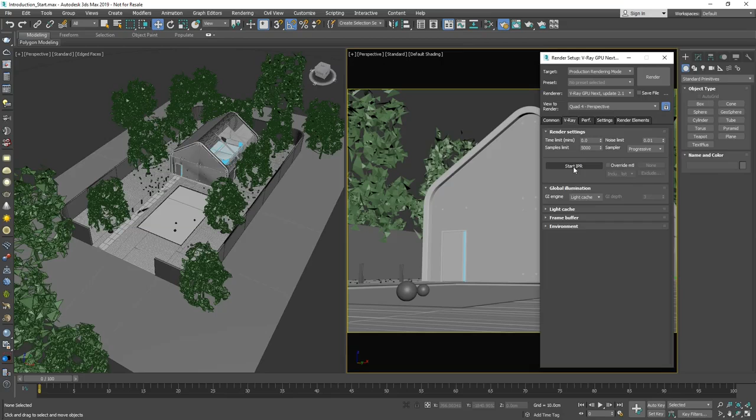Both V-Ray Next and V-Ray Next GPU can use IPR, and you can also start an interactive render from the V-Ray Frame Buffer, or VFB for short. Let's close the render settings and open up the VFB, which is the render display window for V-Ray renderings that includes a number of V-Ray specific features we'll discuss in more detail in a bit.

For now, let's go ahead and start the IPR by clicking on the little teapot with the green arrow at the top right, and see what we've got in our scene here so far. We can tell it's rendering because of the progress bar at the bottom, which shows the progress of the render. However, you can see that everything is dark, and we're not seeing anything in the VFB. This is because we don't have any lights in our scene yet.

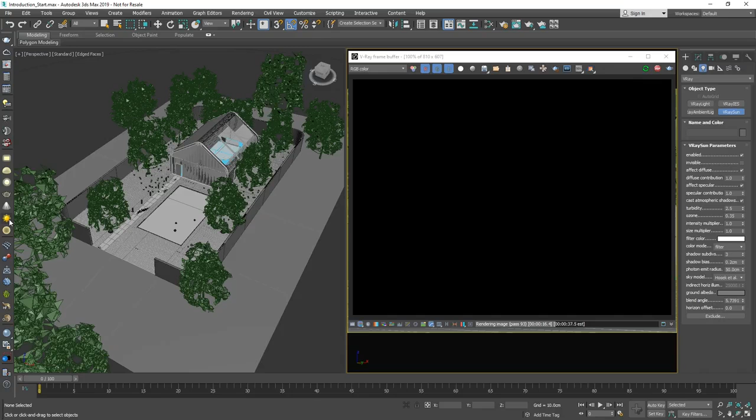To add some light, let's go to the V-Ray toolbar and select the V-Ray Sun. The V-Ray Sun gizmo consists of two parts, the sunlight source and a target. In the viewport, let's click and drag to place the sun source and draw out its target direction in our scene.

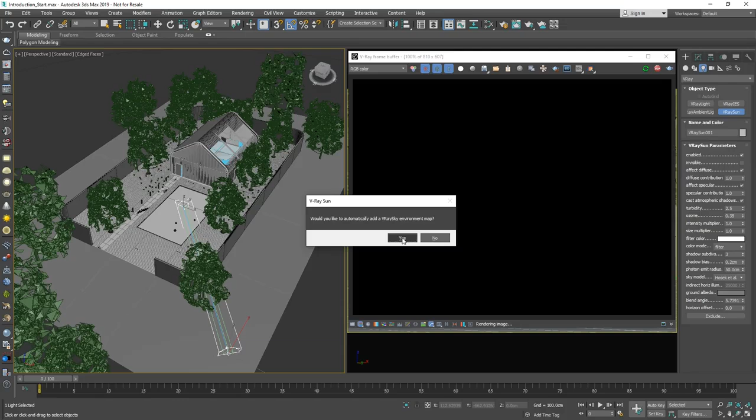Next, we will be prompted if we want to add a V-Ray sky map in the environment slot. Let's choose Yes, since the V-Ray sky map will automatically change in accordance with the sun's position. This creates a very easy setup that enables us to try out a variety of natural-looking sunlight scenarios simply by moving the sun's position around.

Now you'll see that the VFB immediately updates to display the sunlight. Let's go ahead and tweak the position of the sun by bringing it up above the ground level a bit on the Z-axis. As we move the sun higher, you'll see in the VFB preview that our image quickly becomes overexposed.

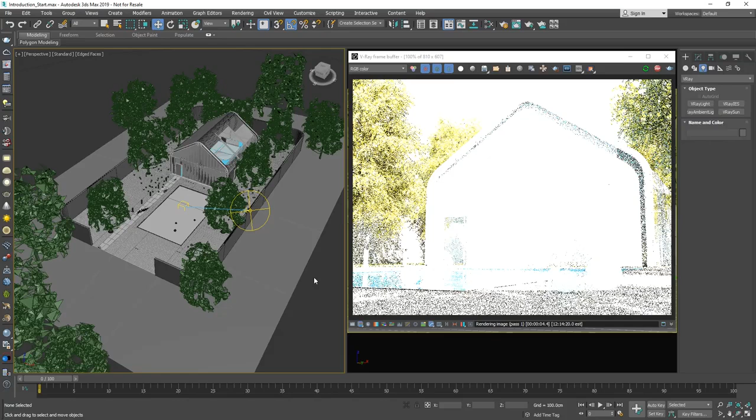This is because we haven't set up a camera in our scene yet to adapt to the sun's exposure value. To create a camera from our current perspective, let's move the VFB over and then select this perspective I have already arranged in advance in the viewport on the right. Then click on the V-Ray Physical Camera shortcut, and a camera will be created and applied to the perspective's position.

You'll also notice that the exposure in the VFB has automatically updated, as the render is now taking into account the physical camera's exposure settings. If you'd like to tweak the exposure further, you can head to the camera's settings in the Modify tab, where you'll find controls that emulate those of a real-life camera. These include the film speed or ISO, the f-number, shutter speed, and many other options.

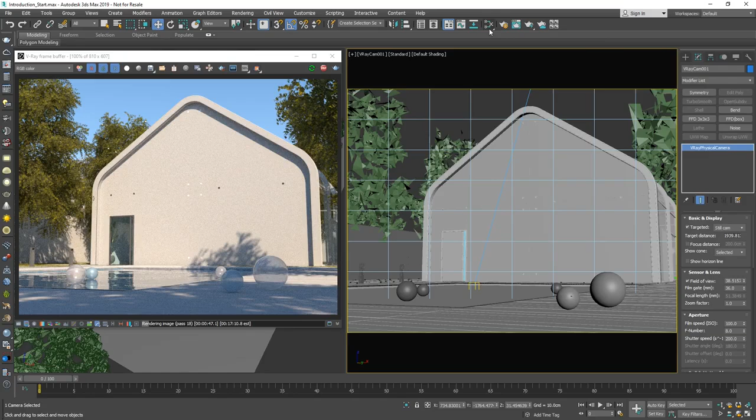Alright, you may have noticed that many of the objects in our render have a generic gray material applied to them. To create some new materials, let's open up the Material Editor and then maximize the viewport view by pressing Alt-W in 3ds Max and explore how to create and apply V-Ray materials to our scene.

Creating new materials in V-Ray is easy. Simply right-click on the Material Editor's canvas, and in the Materials menu, you will see a V-Ray section which contains all of V-Ray's material types. Also, if you go to the Maps menu, you will find a V-Ray section there too, with maps that only work with V-Ray materials.

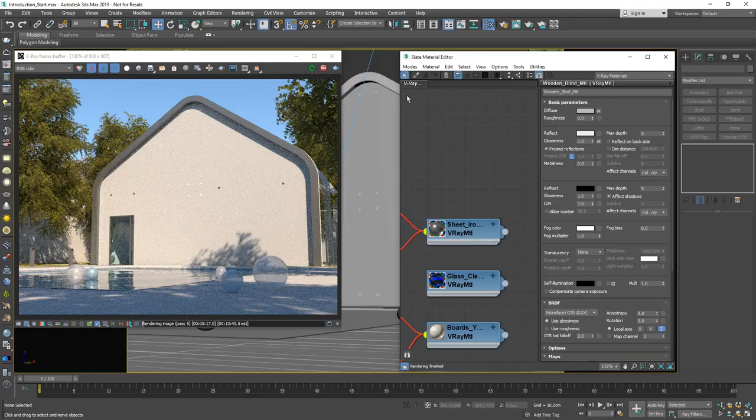As you can see here, we already have 3 V-Ray materials I have prepared in advance to use in our scene. Let's go ahead and apply each of them by simply dragging their outputs to the corresponding objects in the scene. Now you can see as the render updates that our image is quickly becoming much more realistic looking with the added materials. And we get an updated preview right away thanks to the IPR mode.

Alright, now let's explore how we can do a final production render. Close the Material Editor, press Stop to stop the IPR, and exit the VFB. And then let's open the render settings once again.

First, in the Common tab, let's increase the resolution of our final render by adjusting the output size. I'm going to set it to 1440 by 1080, but you can feel free to use a different resolution if you'd like. From the V-Ray tab, let's also change the sampler mode from progressive to bucket mode.

So far, we've seen progressive sampling when using the IPR mode. It generates a preview of the whole image as it renders and cleans up the noise, which is useful when you need interactivity. It also gives you control over stopping the render early if you are okay with the result.

For a final production render, however, bucket sampling is generally advantageous as less data is kept in memory, especially when working with render elements. In addition, buckets can also cut down on network traffic for distributed rendering and reduce the risk of losing information if a server goes offline.

Another setting you can tweak to improve the quality of your render is the noise threshold. When rendering, V-Ray will continuously clean up the noise in the image over time so that the image becomes clearer.

The noise threshold determines if a pixel needs more samples. The lower the threshold, the less noisy and higher quality the final image will appear, but the longer it will take to render. Since I prefer getting a faster render result than achieving the highest possible quality, we can add a V-Ray denoiser render element in the Render Elements tab.

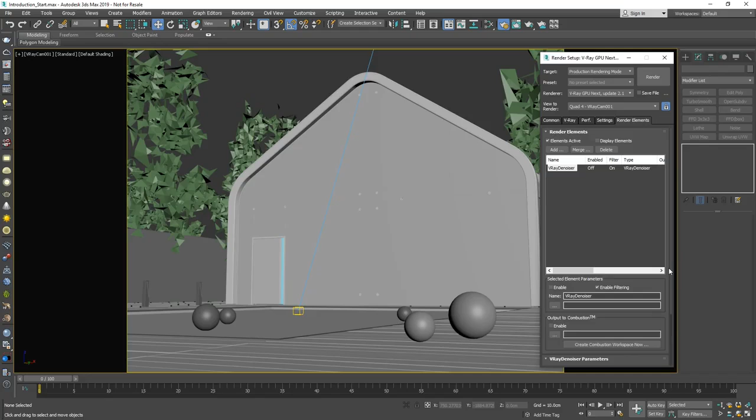Okay, now we can start a production render by pressing the Render button. And once it starts, you'll see how the buckets appear and begin rendering the image.

Alright, now that V-Ray finished rendering, I'm going to maximize the VFB so we can have a better view of the rendered image. Then, let's zoom in on the glass door, and to double check that the denoiser worked, we can toggle the RGB button here to switch between the default RGB image and the effects result.

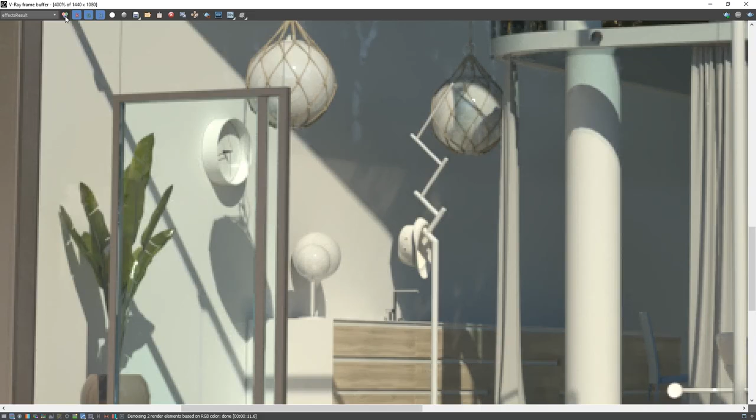The effects result channel holds the result of the denoising operations and the lens effects that are executed over the image. You can see that the denoised image is a bit smoother looking overall, particularly in the glass and shaded areas. Now, since our image looks a bit too yellowish and flat for my taste, let's explore how we can apply some color corrections to it.

If we click the button at the bottom left of the VFB, the V-Ray Color Correction toolbar will appear on the right. Here you'll find parameters for further tweaking the image, such as exposure, white balance, curve adjustments, and more.

Let's click to expand the exposure parameter and check the box to enable it, so that now its controls will affect the image. I'm going to adjust the exposure value, the highlight burn, which corrects the exposure of only the highlights in the image, and tweak the contrast a little bit.

Next, I'm going to tweak the white balance parameter, which offers a slider with values in Kelvin temperature. Lower values will make the scene appear warmer, whereas higher values will make the scene bluer in tone. You can feel free to play with these settings on your own and adjust the image to your liking.

When you're done, you can also save your current color correction settings for later use, or even load in a pre-existing color correction file by clicking on the Globals option up top. In this case, I'm going to load in a color correction file, which you'll find in the Assets folder for this lesson. And right away, you'll see how quickly the image changes as the new color corrections are applied.

Alright, moving on with the VFB tools, we also have a history panel for saving and comparing images, which is marked by the H icon at the bottom of the VFB toolbar.

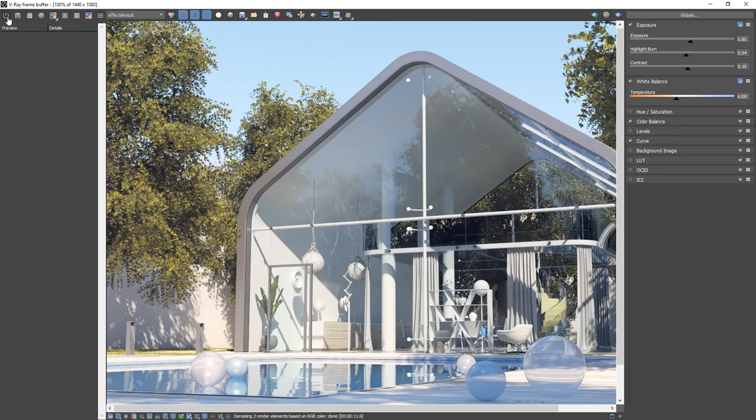First, click the power button icon to enable it, and specify the directory where the image will be saved as V-Ray image files. Then, we can save our image to the history with the color corrections applied by clicking on the disk icon at the top left.

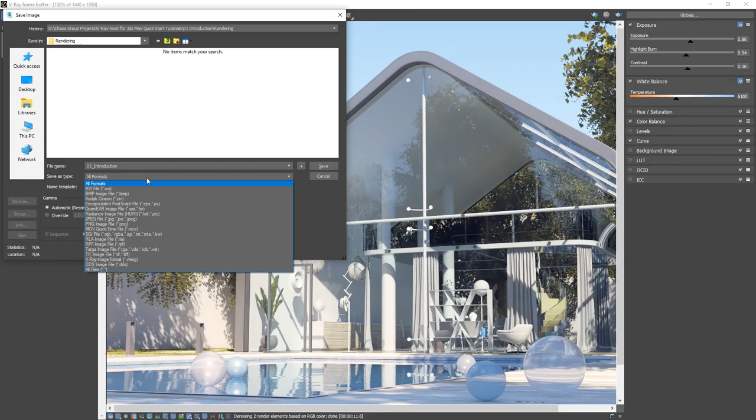We could then even apply different color corrections to the image and save another version to the history following the same steps. I'm also just going to save the image as a standard JPEG file to my hard drive by clicking on the disk icon at the top center of the toolbar in the VFB. Note that you can choose from a variety of other image formats using this method as well.

Alright, now you've seen a quick overview of how to get started rendering and working with V-Ray Next for 3ds Max.